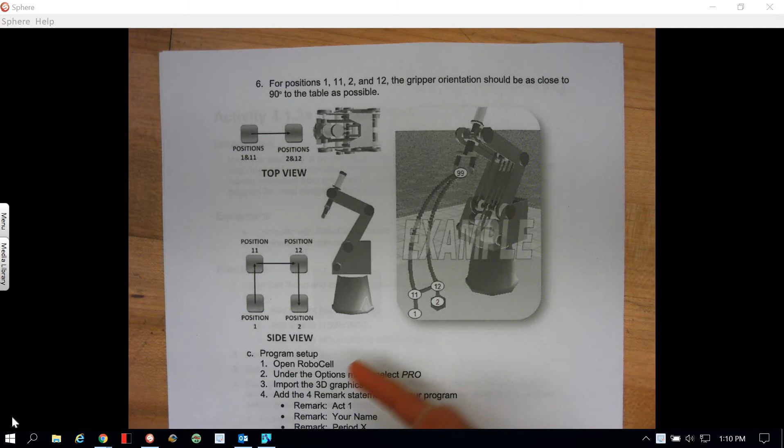All right everybody, this video is an intro to RoboCell for my CIM class, PLTW CIM class. I just wanted to give you guys a quick intro on how to set up your first pick and place routine with the different positions and how the robot works and how you can program positions.

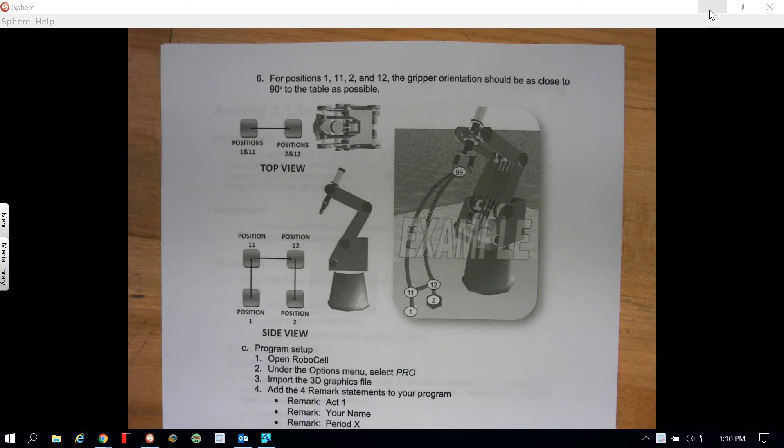Before you actually get into RoboCell, you have to set up your virtual workspace in Cell Setup. So we're going to go to Cell Setup - whoa, it's a busy space here. Okay, so in Cell Setup we are going to organize.

We're going to hit New Cell, and this is our workspace. We can zoom around in here and see it kind of goes off into an infinite world, on forever and ever. So we need to set up a couple of things here.

The first thing we want to set up is a table. So we can go under General and hit Table, and the first assignment tells us to set up a table that is 1000 by 1000. We'll let that be placed right in the middle.

The robot we're going to be working with is the ER4U. The first time we're going to do it, it's no slide base - we're just setting up a simple robot arm. That's our first robot, and we can move our table.

It's right under the robot, okay. And then for our first assignment, we're going to be using a single cube, and it defaults to red.

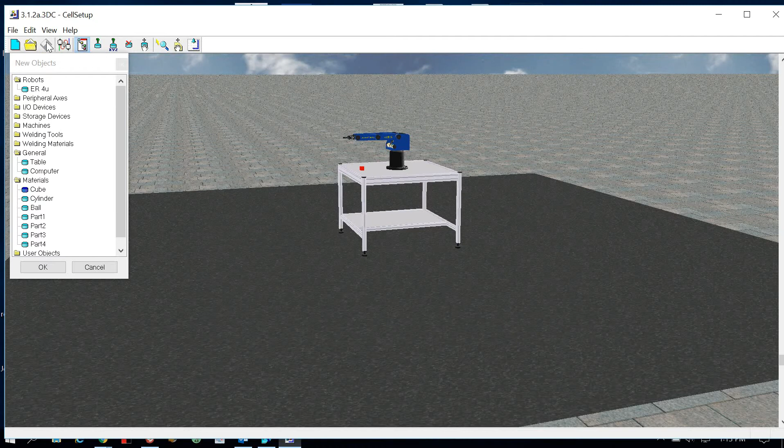Okay, so you're done in Cell Setup. We're going to close Cell Setup and now open up RoboCell. RoboCell is where you do the actual programming, while Cell Setup is where you set up your workspace. The workspaces will get more complicated as you go through the assignments, but you now at least know how to bring in a material, bring in the robot arm, bring in a table, and so on. So you're going to hit New Program.

Then you need to import the 3D model that you just made. So you're going to go to the 3D model we just made, which is 3.1.2a, and open that up - there's our 3D model. You can see how it's kind of disorganized here.

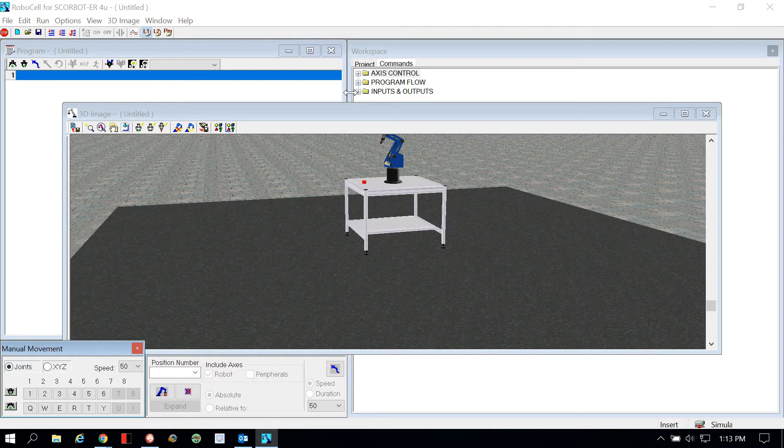I like to hit the Simulate and Teach button, and it kind of spreads everything out for you so it's a little easier to see. Down here is where we're going to be working a lot with teaching our positions. You can see that we can't expand it right now, and we need to be able to expand it, so you're going to hit Pro. Now we can actually expand it.

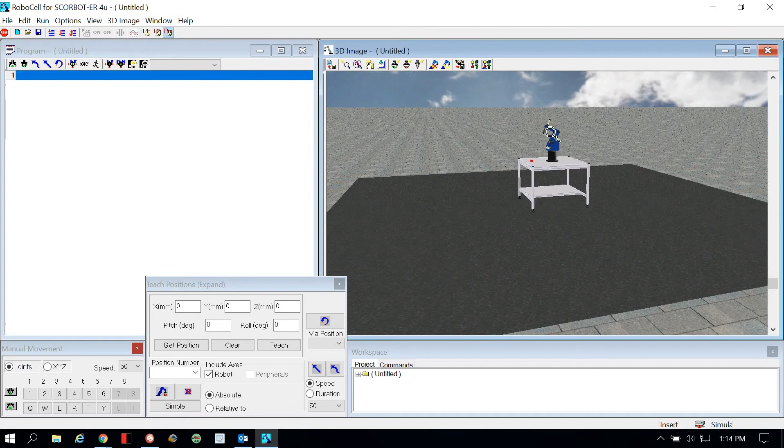Okay, so now that you have it expanded, we can start working with our robot. There may be different ways to program these - this is the way that I know how to do it, so that's how I'm going to show you guys.

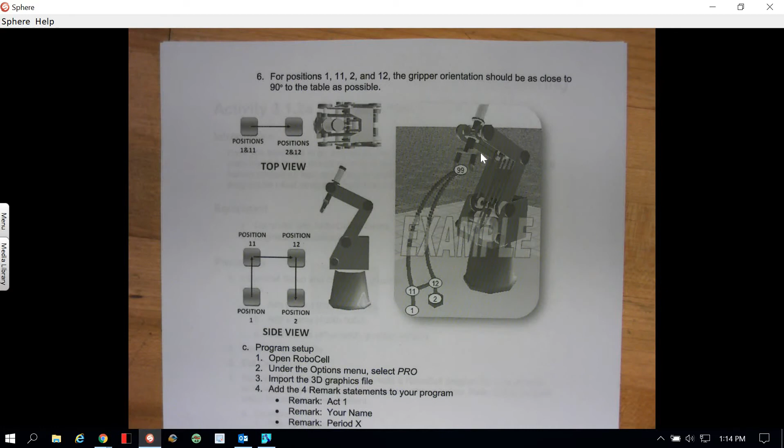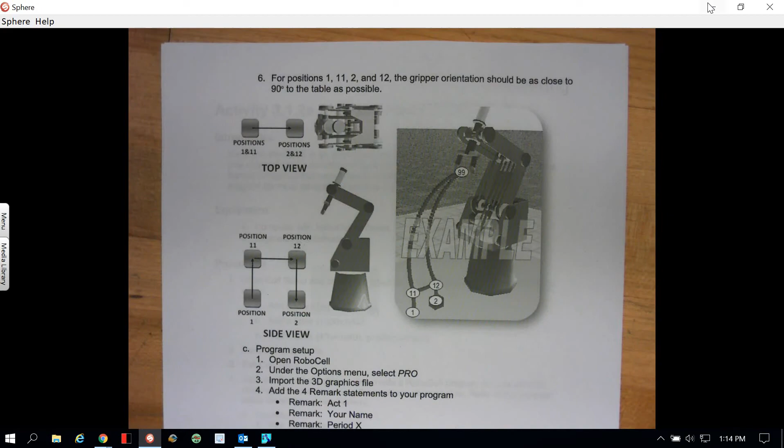So our first position, if we look at our assignment here, our first position is going to be 99 right up here. We got 99, and then we need positions 1, 11, 12, and 2. At this point, we need to teach it position 99 because that's where we're actually at - we are at position 99 at the top.

So we're going to say position 99, and then click record position. Once you have 99 as a position, we can say get position, and this is where the robot is currently at - it's up in the air, that's our home position. We're going to hit teach. So now whenever we tell it to go to 99, it will go back to this position.

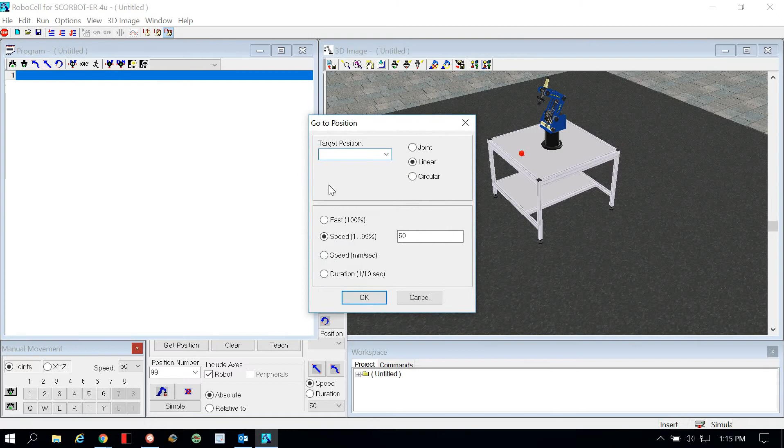So if we wanted to program our first line of code here, we'd say go linear to position, target position 99. So it's always going to go back to 99. Now we want it to go down to position 11, and position 11 is above our block.

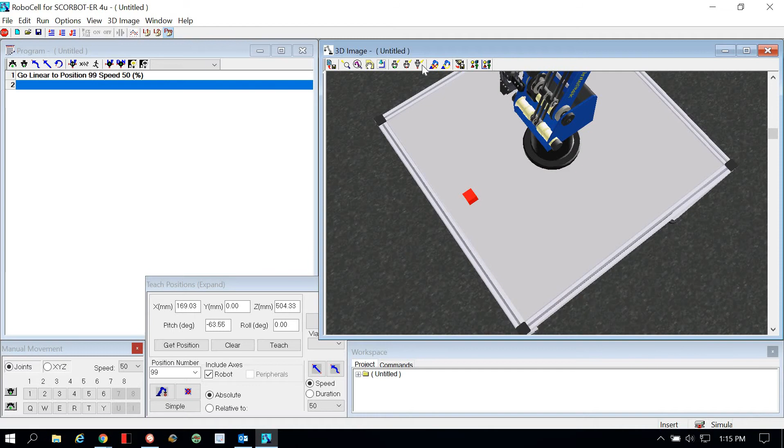Okay, I'm not using a mouse here, so you guys have to forgive me. So above our block, we're going to hit send robot to above point, and click on our block, and we can see now that our robot is above the block, and that position is position 11.

So we're going to say 11, and teach it to record the position. We're going to get the current position, and you'll see that X, Y, and Z change to the current position. If you remember, our block is at 400, 0, so it makes sense that this is somewhere around 400 and somewhere around 0. So we say get position and teach position.

Now we've programmed position 11. So we can go back up here and say go to position 11.

And we can go to this position quickly because we're still way above the part. Then after that, we want to open up your gripper. And so we're going to hit open gripper.

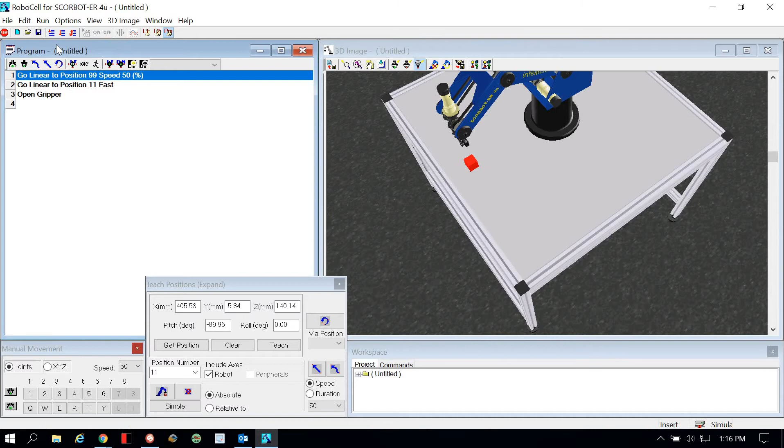So now let's run our robot. Let's run this first program to see how we're doing with our program. So I'm going to click on the first line, and I'm going to say run a single cycle. So it's going to go back up, it should go back up to 99.

And we're going to show the robot path. Now it's going to go to position 11. And then it should open up the gripper. And you can see that the gripper is now open.

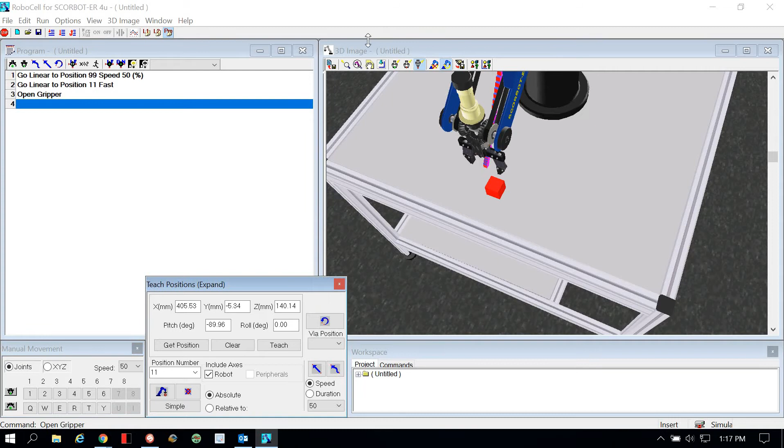And then now we're going to go down to the part. So, send robot to object. We're going to click on the object, and now we're at the part. And this is position 1. So we're going to say position 1, record the position, get the position, and then teach the position.

All right, so now we should be able to say in our program, we're going to say go target position is position 1, and we want to go there half speed because now we're near the part. So we're going to leave it at 50%.

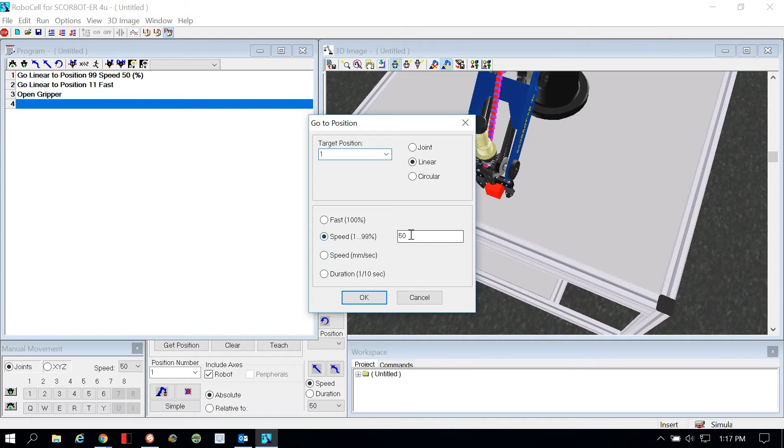Okay, so now we should see we can reset our work here. There's our robot. We're going to start at the beginning. We're going to say run our program. So we see it go to position 11, and then we can open up, go down.

Oh, I should zoom in there and see if I can zoom in. And we should be at the part. And so now you would close the robot arm, and you don't have to program any position. So we're going to close the gripper.

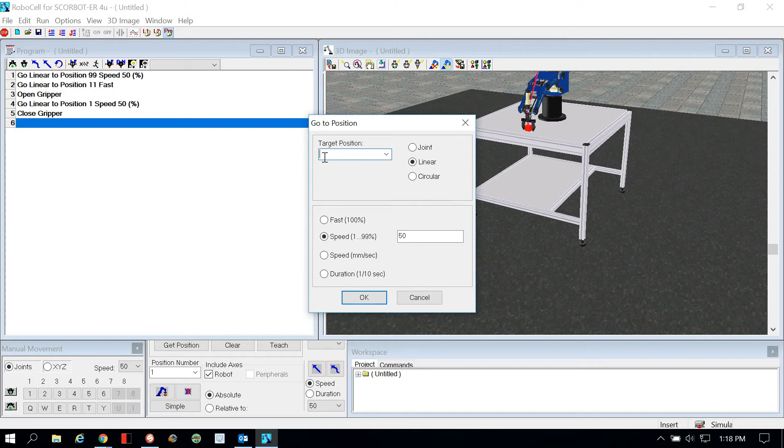Okay, and then we've already got the program where it's got to go to next, which is position 11. We've got to go back to position 11, and we're going to go slowly, hit OK. And I like to do these things one at a time. I run it as I test it, just to make sure I'm not missing anything.

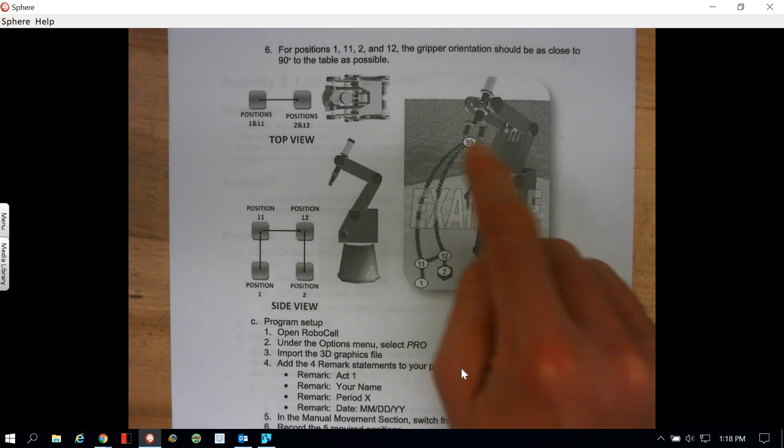So we went down to 1, we closed the gripper, went back up to 11. So now, according to our assignment, I'm not going to do the whole assignment for you. You guys need to do some on your own. We've gone from 99 down to 11, picked up the block.

We're back at 11. You're going to go over to 12 and back down to 2 and open it up, go back up to 12, and then back up to 99. So you've got to be going to these positions before returning to 99. You can't just go from position 2 to position 99.

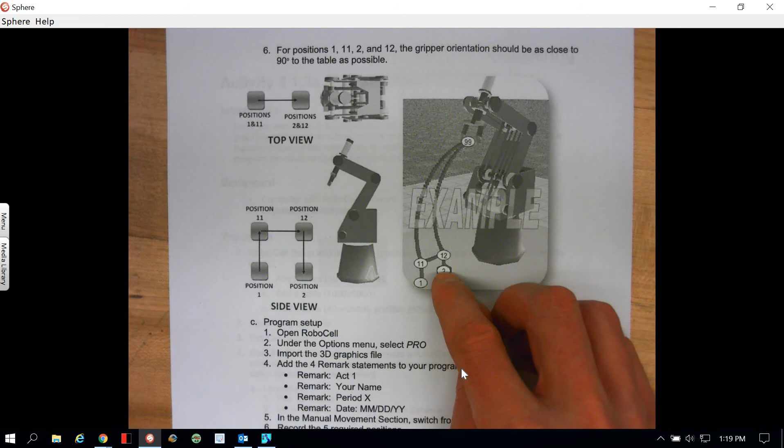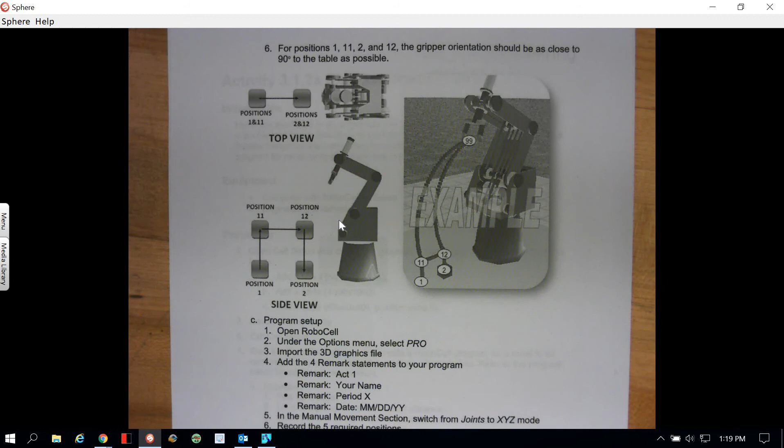In the next assignment, you don't have to redo your whole pick and place routine. All you have to do in your next assignment is when you are teaching the positions, you can say go to position 1, and you'll put the exact position it says in the assignment.